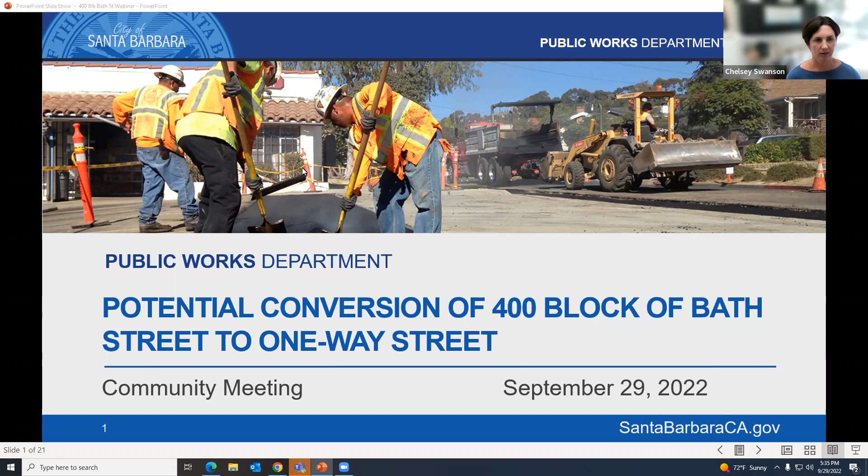Before we get into the details of the 400 block of Bath Street, we want to share the bigger picture of why this is being considered.

We've heard from the community through the development of both the city's pedestrian master plan and bicycle master plan update that biking and walking does not feel safe or comfortable at the Castillo undercrossing under Highway 101, and also leading up to the undercrossing on Castillo and Haley Streets.

Castillo is also a Vision Zero priority corridor, an area where serious injuries or fatal collisions occur in a consistent pattern. Therefore, this corridor is identified in our planning documents as needing safety improvements for walking and biking facilities. The city received grant funding to develop a preliminary design concept for these safety improvements.

That's why we're now reaching out to the public to receive input on those concepts. The design concepts we're considering would require some changes to the roadway configuration and signal timing, which is why we're meeting with community members adjacent to the 400 block of Bath Street to discuss those changes first. We'll have two additional meetings next Thursday and Saturday to discuss the details of the larger project.

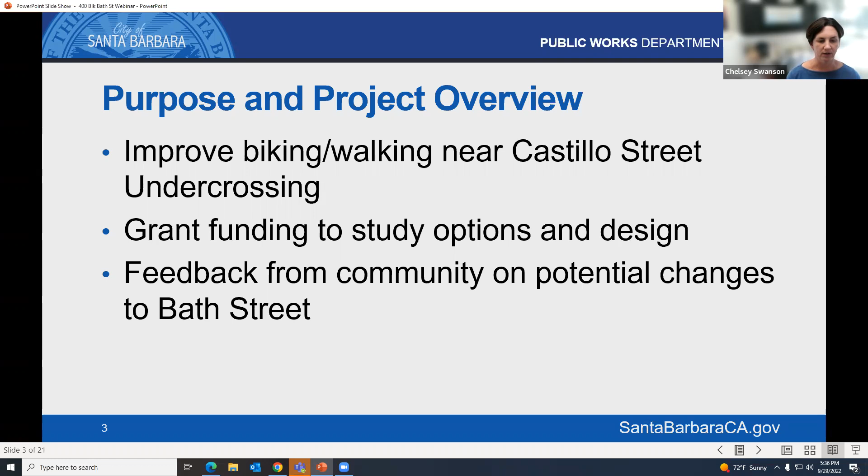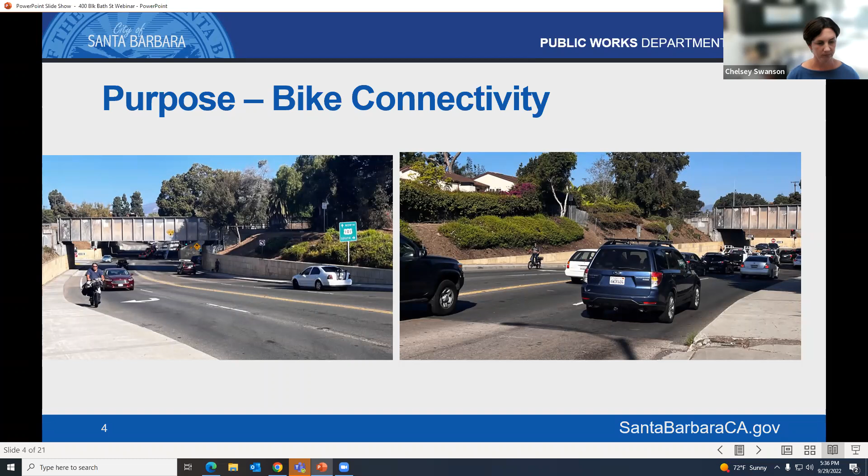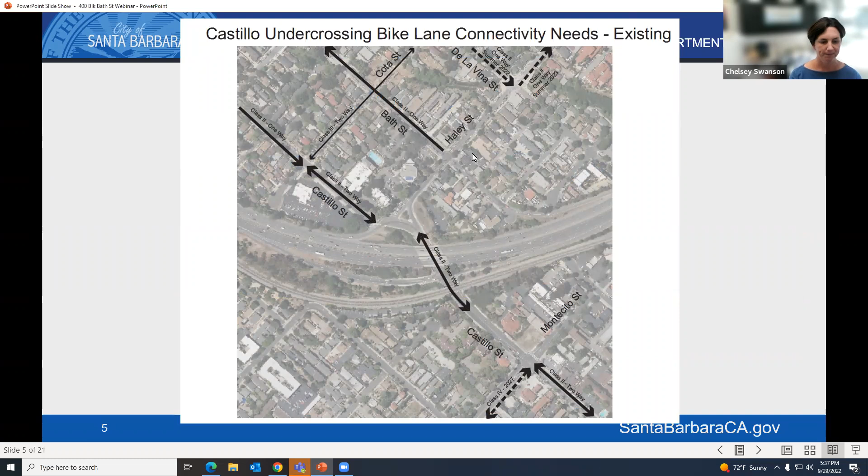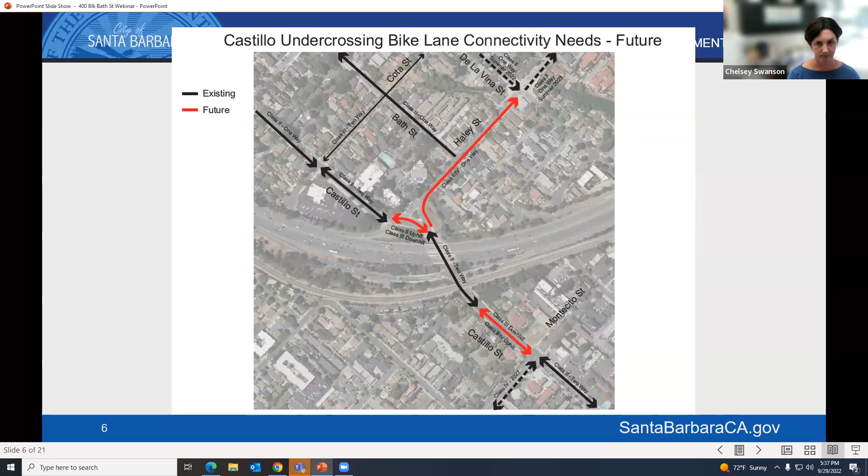With regard to sidewalk facilities, there are currently narrow sidewalks on sections of Castillo and Haley with no buffers such as street trees or parkways between pedestrians and traffic.

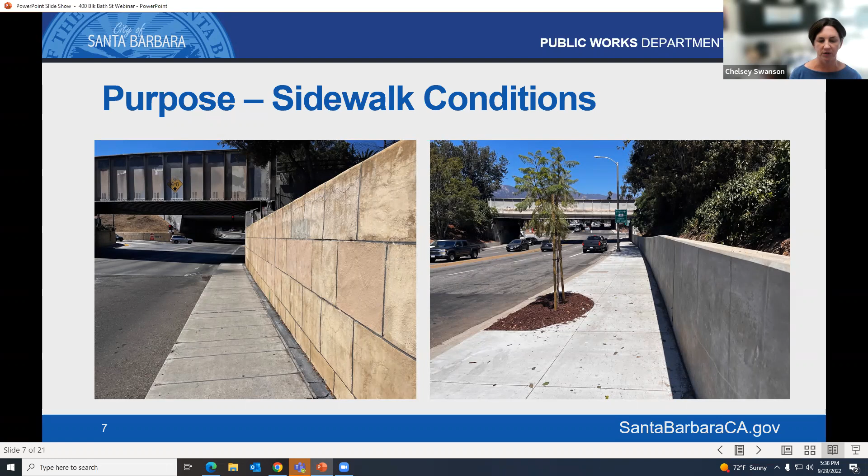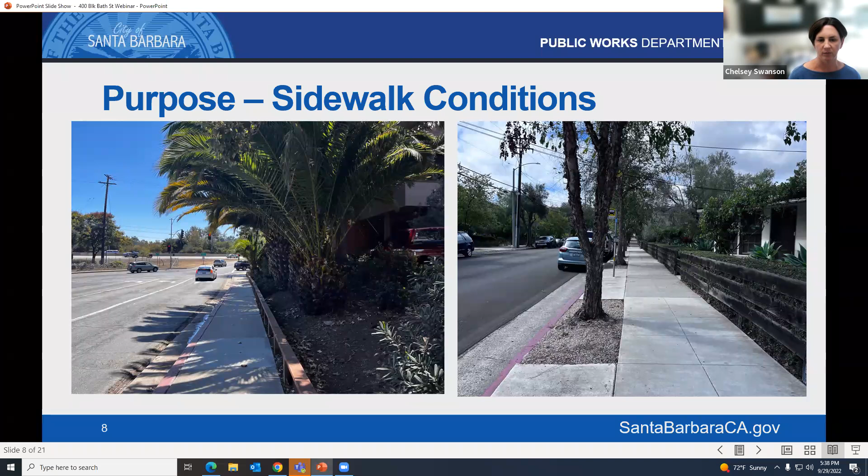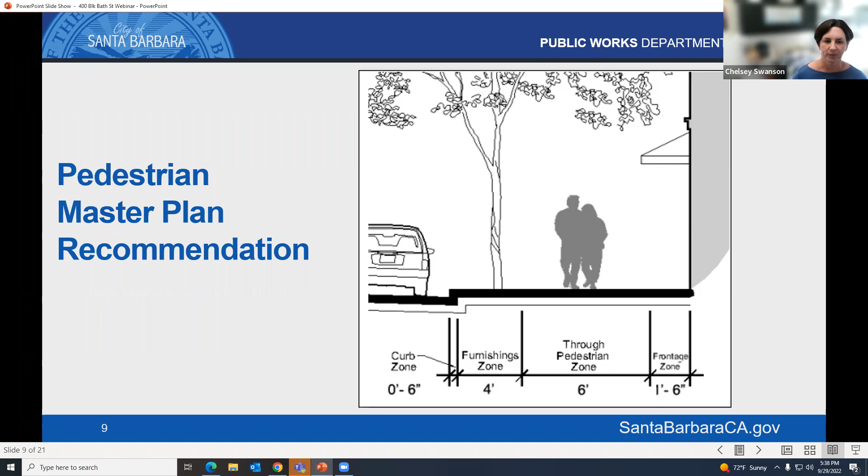Next, Derrick will describe the details of the different options for bike and pedestrian facilities and how they would change traffic conditions on the 400 block of Bath Street. Thanks, Chelsey.

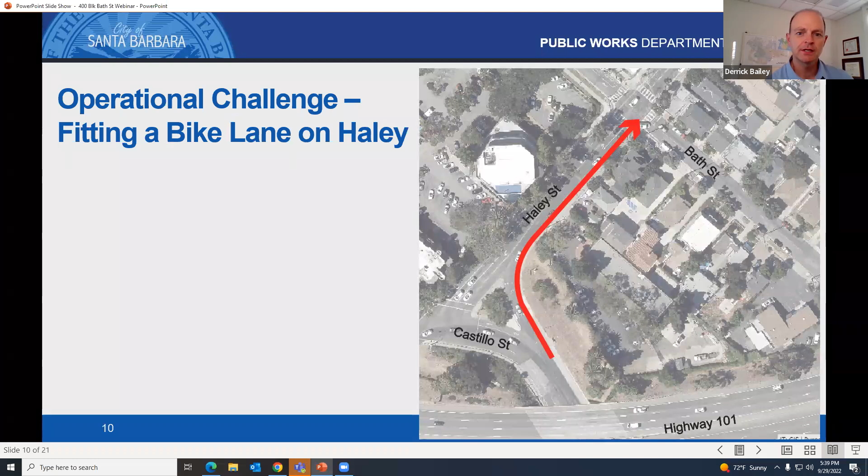So if you go to the next slide. On the left, that's the image we just looked at. On the right, if we zoom in on the Bath Street and Haley Street intersection, just immediately west of the intersection, you can see the existing traffic lane configuration.

There's two lanes pointing down, those are going towards the freeway on-ramp. And then in the other direction, there's a left turn lane to go up Bath Street and then a through lane to go up Haley towards downtown.

So within the roadway itself, the road's maxed out as far as the number of traffic lanes. There's no opportunity to narrow lanes or try to squeeze things together anymore to fit in a bike lane to go towards downtown in this area. Go to the next slide.

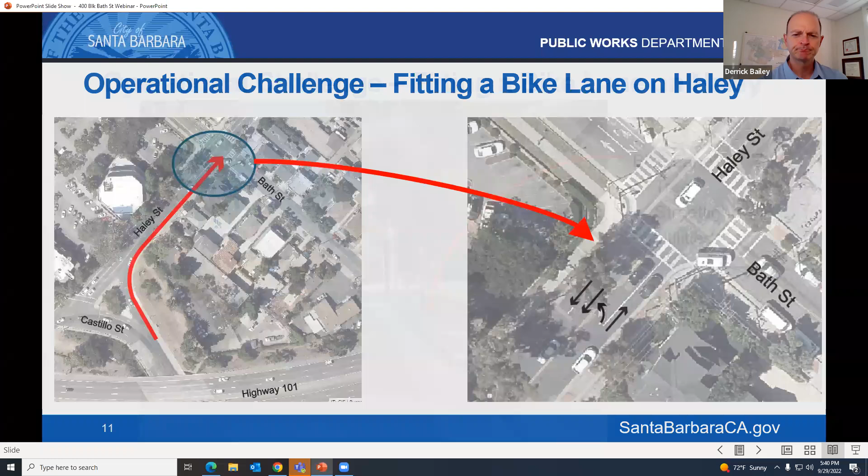It would require some construction. More importantly, some of the obstacles in that parkway area - there's a nice street tree, some street lights, and some pretty heavy duty utilities in that area as well. So this would be very expensive and we're not even sure if it's feasible at all. This would be a very challenging option to implement.

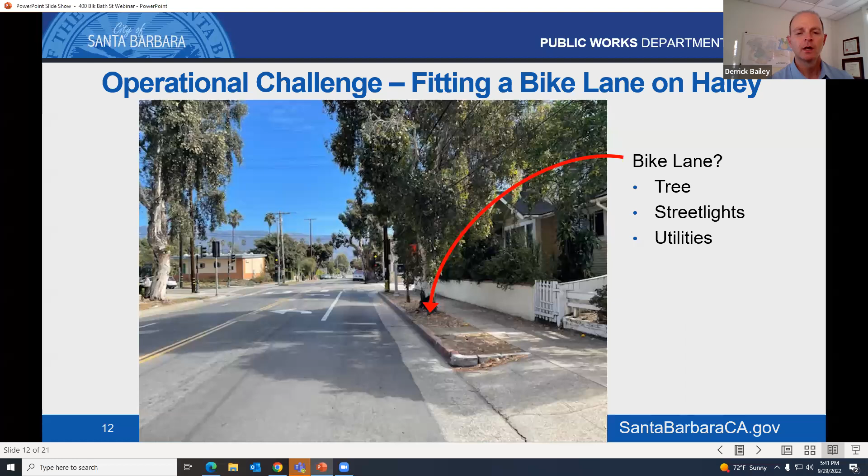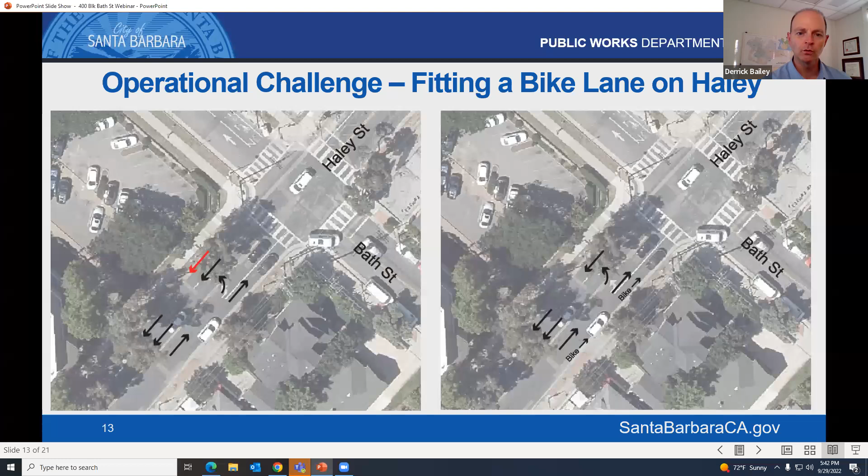Next slide, thank you.

So that has a domino effect. If we eliminate a traffic lane immediately west of the intersection - what we call an accepting lane, since the lane on the far side of an intersection accepts the traffic - then if we only have one accepting lane on the west side going towards the freeway, that means we can only have one lane feeding into it on the other side of the intersection. Currently, going on Haley Street towards the freeway there are two lanes, so that would have to go down to one lane feeding into the intersection. That will create some capacity reductions at the intersection.

So we were looking at: is there a way to offset those capacity reductions at this intersection? The idea developed is, what if Bath Street were to become a one-way street going northbound towards the intersection? Currently on Bath Street there's one lane coming up from the freeway and one lane going down towards the freeway. If that were to change, that leftmost lane going up towards Haley Street would become an exclusive left turn lane to go towards the freeway, which would likely give us the capacity to offset the loss of the lane on Haley Street.

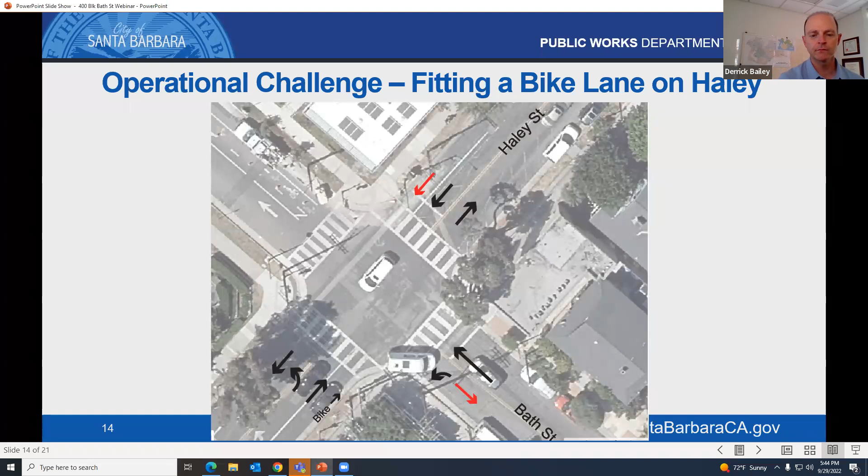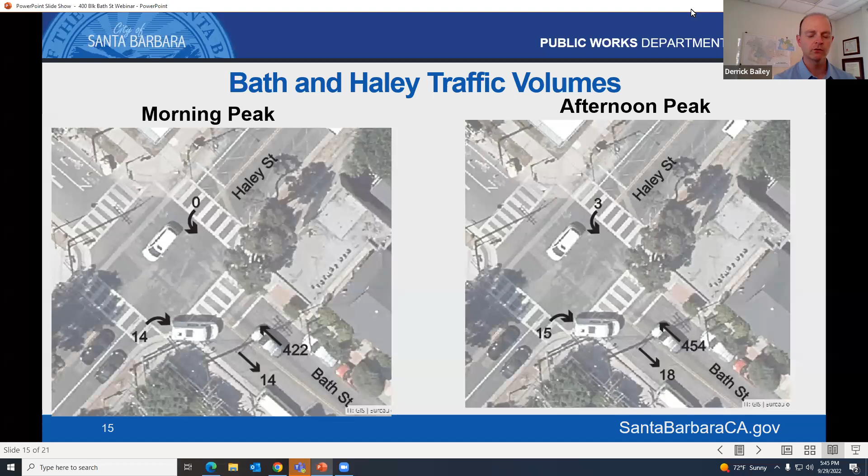So just from a capacity perspective, it seems like the best lane configuration would be to favor going northbound on Bath Street. Next slide. But we wanted to confirm that, so we did what's called a capacity analysis.

There are some calculations we can do to measure the capacity at the intersection under different lane configurations. During the morning peak, 69% of the intersection capacity is being used. In this case, if the number were 100%, that means all of the capacity at the intersection is being used and traffic is backing up, unable to get through. So lower numbers mean less capacity at the intersection is being utilized.

During the morning peak, existing is about 69%. If we were to change the lane configuration, that would drop to 46% - a lower number is a good thing, a 23% improvement, meaning less delay, less congestion. During the midday, existing is still 69%; with a lane configuration change, the new would be 55%. In the afternoon peak, it goes from 78% to 75%. So not too much different, but during the morning and midday there'd be a pretty significant improvement with the lane configuration change.

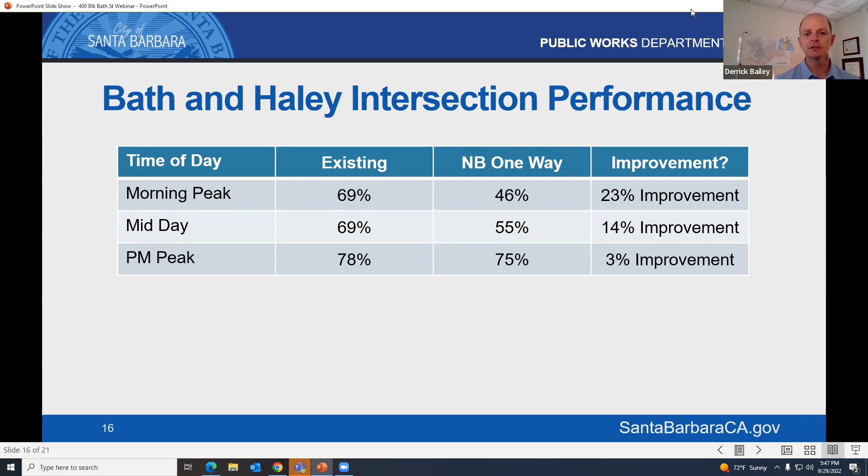But while that looks good on paper, that would mean some access changes to the people who live on Bath Street and have to access the businesses on Bath Street. That's why we're reaching out tonight, to see what the community thinks of that and if we're heading down the right track with this.

One of the questions is, if there were to be a lane configuration change, what would happen between Bath and Cottage Grove as you're coming up Bath Street? There are two options for where the street would become one way. One option is to make it one way at the alley, about halfway between Cottage Grove and Haley. That would mean it's two-way between Cottage Grove and the alley, then from the alley to Haley Street it would be one way with two lanes turning, one going straight and one turning left at Haley Street.

The awkward part, especially with parking, is we started to think about what parking would look like for people on the west side of the street. They'd have to go down the alley, come out, and park facing southbound. We even noticed during our traffic counts quite a few U-turns from southbound Bath, making a U-turn at Cottage Grove to go back up towards Haley. It seems like most people want to be pointing towards Haley.

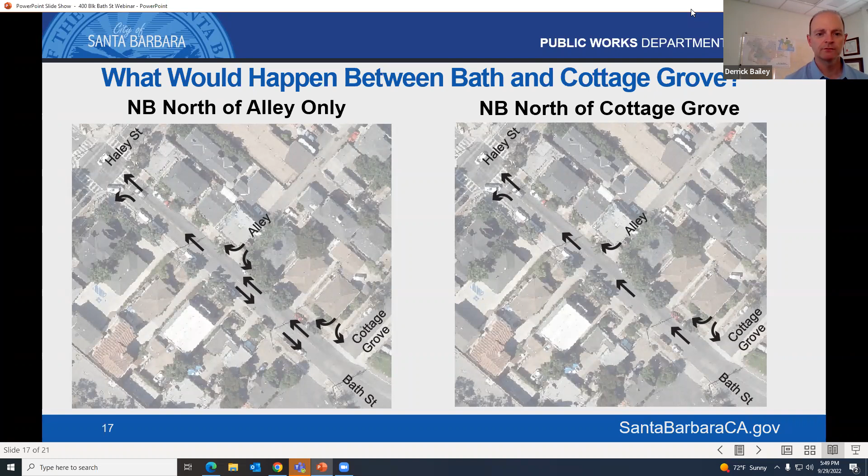Another option, shown on the right side of the screen, is to make it one way from Cottage Grove all the way up to Haley Street. From a traffic circulation perspective, that seems to make more sense to us, but we'd love to hear what the community thinks about that.

So how would residents get to Bath Street if they couldn't go down it from Haley? If they're on eastbound Haley, coming from Castillo towards downtown, they wouldn't be able to turn right onto Bath Street. They'd have to go over to De La Vina Street and circulate back either through the alley or Cottage Grove.

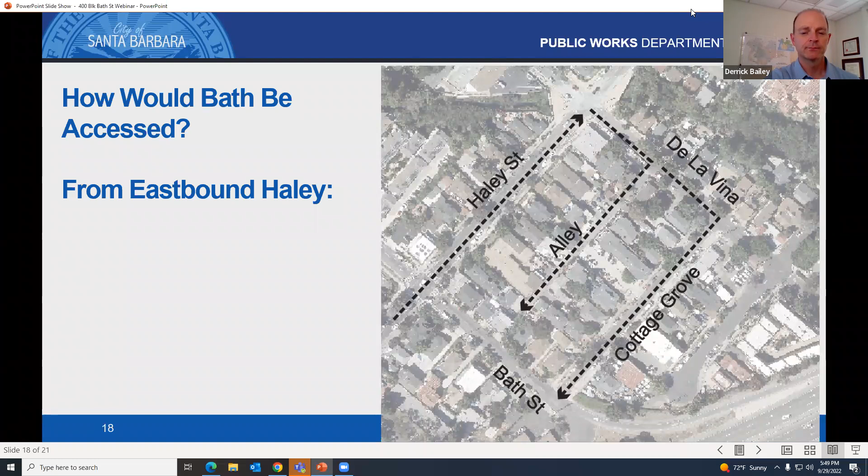And if they're on westbound Haley Street, coming from downtown towards the freeway, they would have to turn left on De La Vina Street and again go down either the alley or Cottage Grove. So that would be a trade-off. The circulation and local access doesn't seem like it would be quite as good, but is it worth that trade-off for a significant improvement in capacity at the intersection, as well as creating a continuous bike lane towards downtown?

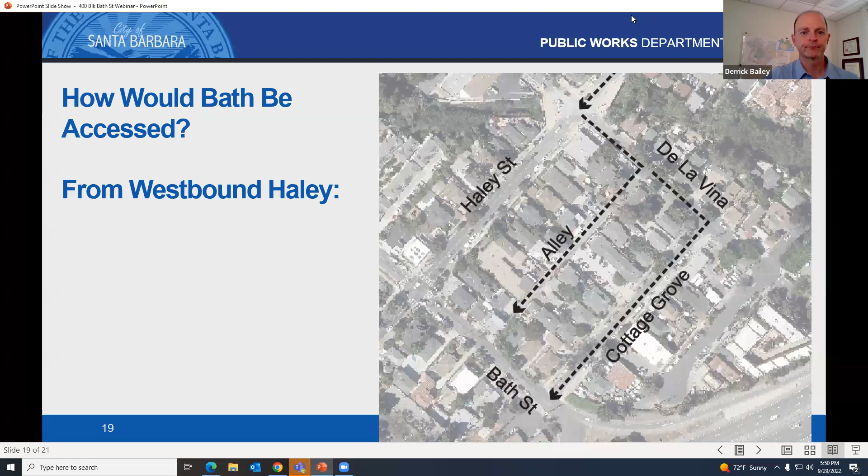I'll turn it back to Chelsea, who'll talk about next steps in the process. To circle back on the purpose of this meeting, we've shared different options for fitting in a bike lane on Haley Street and how it would change the 400 block of Bath Street.

We'd like to hear your feedback specifically about those changes before our public meetings next week about the larger project. The next steps are two public meetings next week to discuss the larger Castillo undercrossing improvements we're looking at. October 6th is a webinar, October 8th is an in-person meeting. In just a second, I'll bring up the webpage where you can register for the webinar or get more information about the in-person meeting.

We'll also have a meeting on October 27th at the Transportation Circulation Committee, which is a public meeting, another opportunity to attend, learn about the project, and ask questions or provide comments. Following these public meetings, we'll take the feedback we received, analyze it, and refine the project accordingly. We may hold additional public meetings if there are still issues we need more feedback on from the public.

The goal of the outreach effort is to have a community-supported project ready for us to go out for grant funding in 2023 or 2024, for the final design and construction of the project. We plan to reach out to the community again with an update when we're closer to submitting the grant application. If funding is received in 2024, we'd return to the community to share updates, likely in 2025, and if we have a project to move forward with, construction would likely occur in 2027 or 2028.